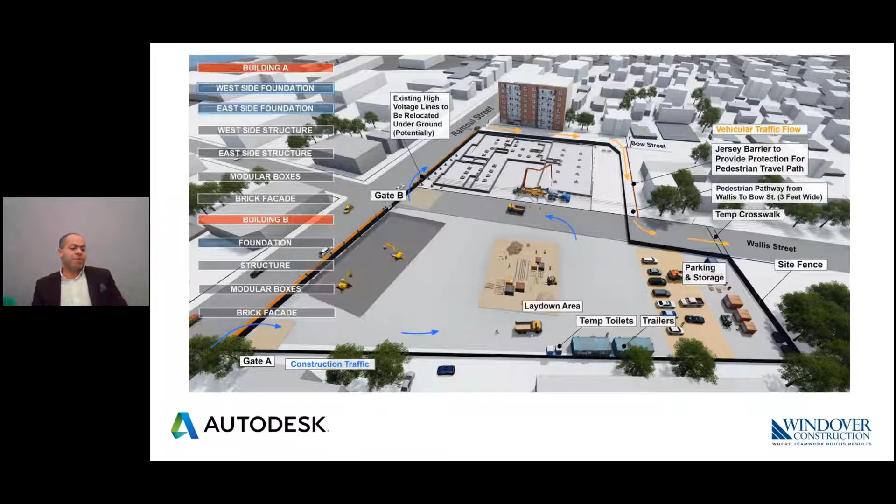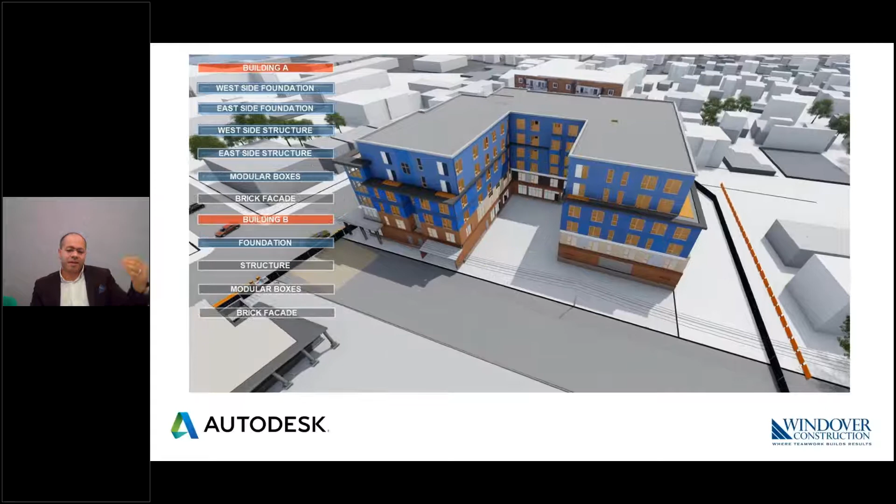are modular construction boxes. The challenge we had here with this project is how to help coordinate that on site with 2 different structure types. As you see here, the scale of that project, as I mentioned, 184 modular boxes on site in Beverly. The challenge here was the first two floors were steel structure and the upper floors are modular.

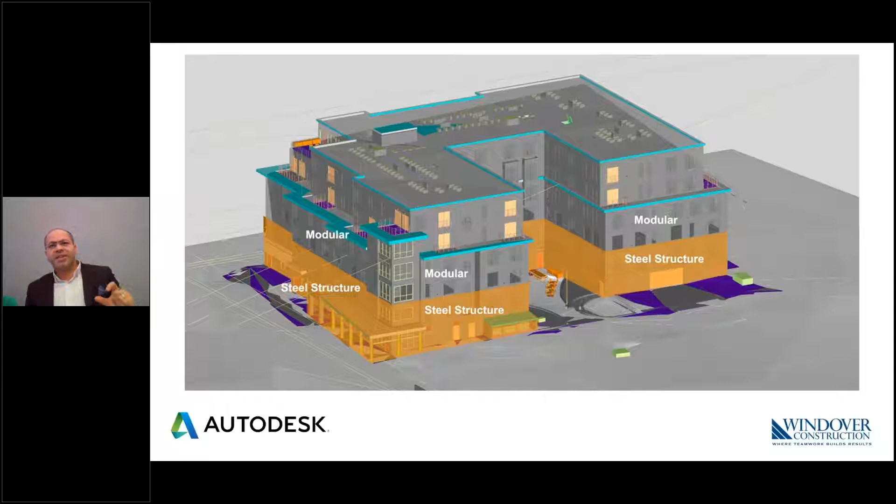The first 2 floors were coordinated through a regular MEP coordination process with a plumber. We modeled all the plumbing elements in Revit, and then coordinated that in Navisworks, and the upper floors boxes were made in the factory that's making the boxes. So how to coordinate between both and make sure that the vertical shafts will fit perfectly and we don't have any surprises on site when we bring those boxes.

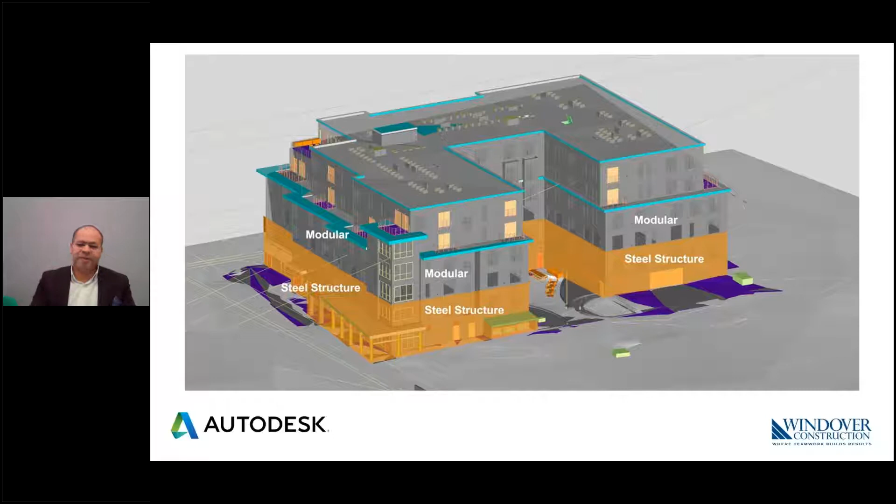So we made sure we place those boxes virtually first before we bring them on site, so they fit on basically the lower 2 floors with a steel structure. How we did that? By combining BIM coordination with drone mapping and laser scanning in real time. As you see here, we use drone mapping and laser scanning every day on our sites at Windover.

What we did in this specific case, and we've been doing in our modular projects, is that after the erection of the steel, we did this in 6 phases. After we erected the steel on site, we fly the drone the same day to capture the as-built steel from above, and supplemented that with laser scanning from below with a Faro scanner that, every 70 meters, is only 3 millimeters off. So the accuracy is there.

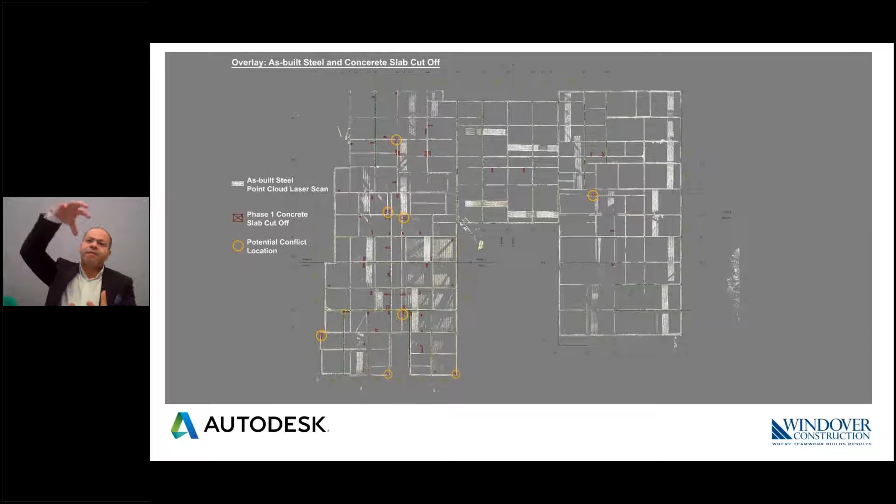And then we combined both point clouds in Autodesk ReCap Pro, to make sure we have all the information from above, the point cloud captured by the drone with ground control points for accuracy, combined with the information we have from below with the laser scanner in ReCap, to do clash detection and detect the conflicts not only with a model created from drawings, but with as-built steel that's on site.

For example, what we see here on the screen, the red box here is where the factory was planning on putting the slab cutoffs for the vertical shafts for the upper floors, for the boxes. And what you see in white is the point cloud captured by both the drone and the laser scan.

And what's circled here in yellow is the potential conflicts that we detected early on in the process and communicated in real time to the factory, so they make the adjustments to make sure when they make the vertical shafts, it will not clash with any steel down below or with any piping.

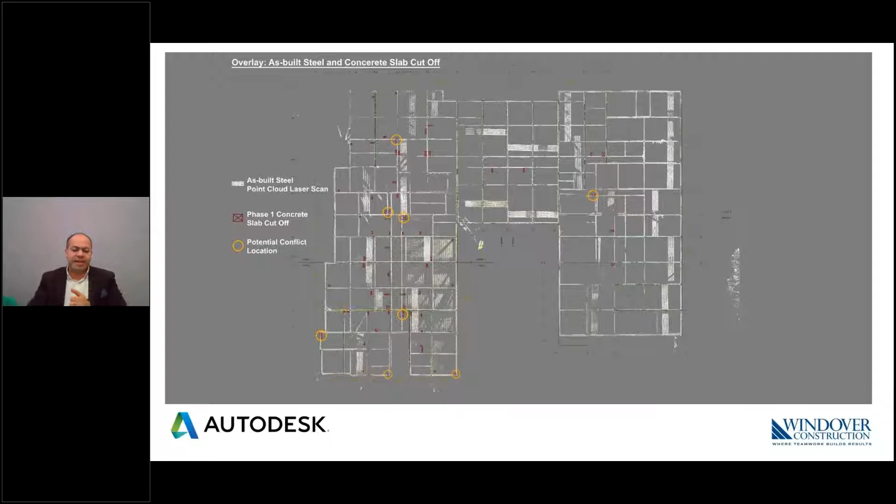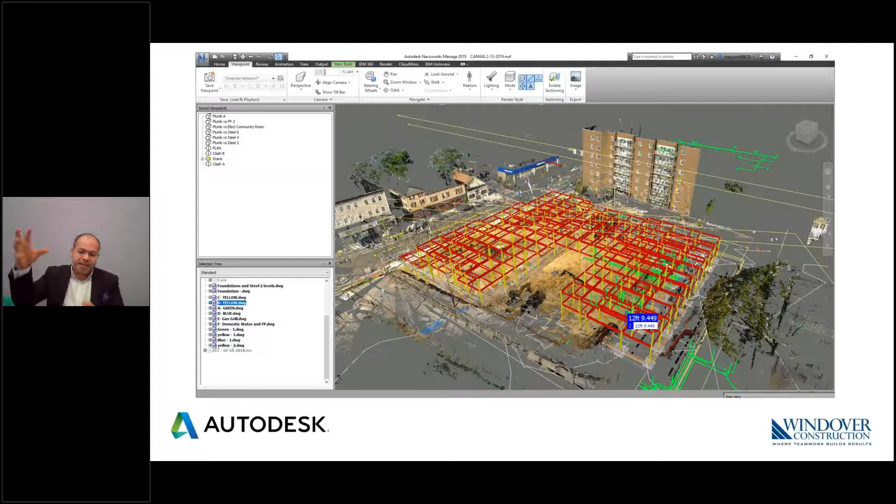We started the whole process, of course, in Revit, modeling all the steel and the MEPs. We also, as you see here in Navis, made sure we, in real time, take all the point cloud that we captured with the drone and the laser scan the same day, overlay it with the plumbing planning we had from below, and do the overlays in real time in Navis. That helped us reach zero clashes when we brought these on site.

As you see here, this is a part of our daily clash reports, which were communicated in real time. Again, time is a very big factor, because when you have boxes made in the factory and the steel is getting erected, the best way to meet the schedule is utilizing this technology in real time.

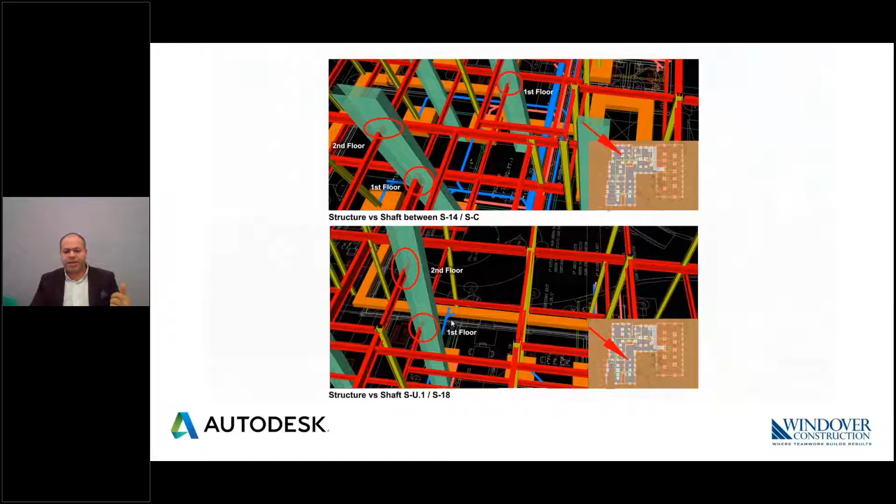Drone mapping, laser scanning, constant overlays in Autodesk Navisworks and ReCap to make sure we communicate these clashes in real time. As you see here, we detected the vertical shaft locations. And so we made sure when we place those boxes, they fit perfectly and all the MEPs are aligned.

To enhance communication in real time, we always communicate through Autodesk ReCap web-based, simple-to-use links with our design team, our field team and the client, so they have at their fingertips, in the trailer or anywhere, the ability to make quick measurements and review the site at any point. We also, at the end of the project, hand the client web-based links from Autodesk ReCap, so 10 years from now they can see what's behind the walls and the ceiling for future facility maintenance.

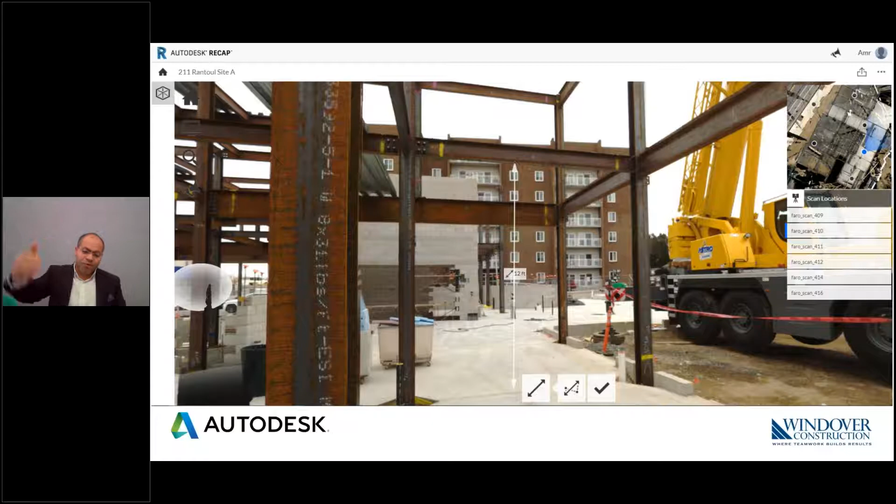So at Windover, we begin with the end in mind. We make sure that we document all the phases, especially with boxes, like in the factory. We document each box with its name or number and hand that to the client so they see how these were built along the way.

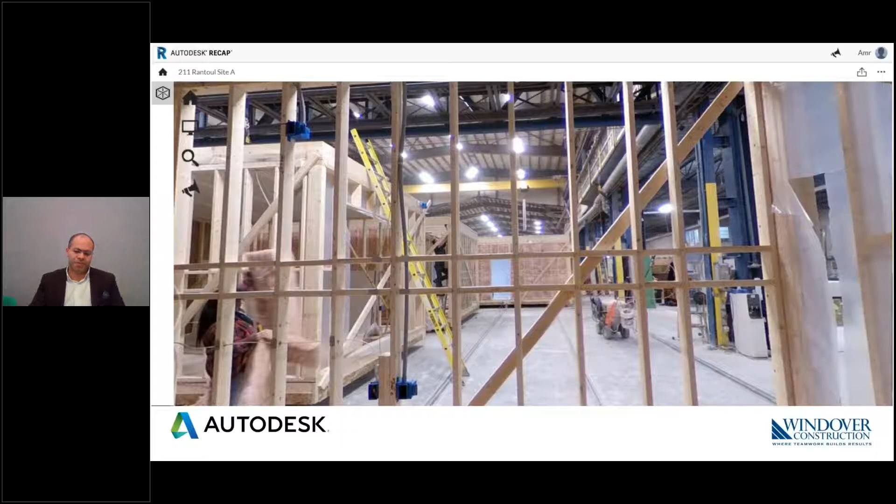Another innovative way we utilized Autodesk Civil 3D is to help detect areas, monitor and analyze the facade alignment, and modify the strapping thickness or the grid size to eliminate issues as the slider went up and down for the building envelope, to help deliver a best-in-class facade that's very smooth and preserves the design intent.

How do we do that? We laser scanned the facade with, again, the scanner that has, every 70 meters, only 3 millimeters off accuracy. We took that point cloud from Autodesk ReCap Pro to Autodesk Civil 3D. We use Autodesk Civil 3D every day with the data we collect from the drone or the laser scan for spot elevations, topographies, and to create contour maps with all the information we collect every day with our drones and laser scanners.

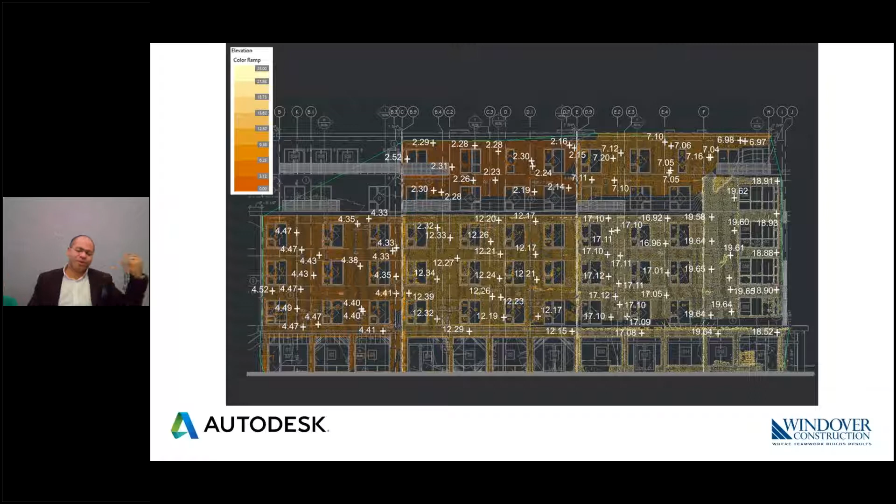Here, what's innovative is that we consider the facade as a contour, as a plane, and we were able to detect the spot elevations on the facade to detect the areas that need attention from our facade team. As you see here, where areas have plumbness issues, this helps resolve that and end up with a smooth, best-in-class facade. So that's another way we used laser scanning with Autodesk Civil 3D to make sure we end up with a high quality product.

So the result for this case study of Canvas in modular construction: combining drone mapping, laser scanning, and BIM, utilizing Navisworks, Revit, Autodesk Civil 3D, ReCap Pro, AutoCAD and ReCap Photo to process all the georeferenced data we have from the drone, helped us end up with zero clashes on site and real-time BIM coordination. It's all real time when you fly and capture this, with constant overlays, communicating with the factories that make the boxes and our field team to mitigate risk in real time.

Preserve the design intent, maximize square footage for the owner. When you fix a clash early in the process before it becomes a problem on site, we protect our owner's square footage and make sure we don't need to reduce any sizes for shafts, or even make the sizes bigger. So we were able to preserve the design intent.

Also, detailed future facility maintenance data by providing the client easy-to-use web-based links that don't require any training, which are the ReCap Pro links. These have been working greatly for many of our clients when we hand over, at the end of the project, what's behind the ceiling and the walls, once we scan that, for future facility management. We'll jump into verification of as-built structure.

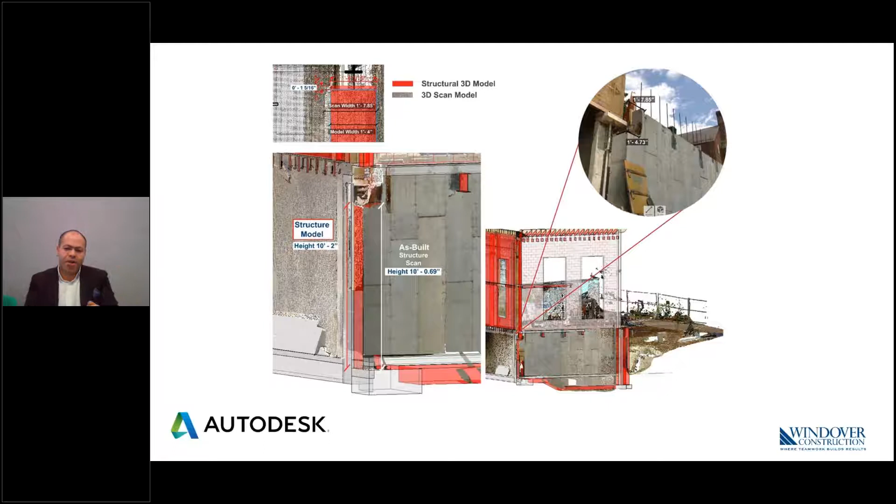Then it helped us detect in this example, and there's so many examples, the pier is a little shorter than it should be. Well, when we scan, say in the morning, and communicate that with our great field team, same day, they were able to communicate that with the foundation trade partner and help resolve that in real time. That's a great example of laser scanning, of drone mapping, constant overlays in Revit to detect the conflicts and help visualize them and communicate them across the project stakeholders.

As you see here, real-time QA/QC define the visual communication in the field. There's no way you can figure out this in 2D. It's all the Revit model overlaid with a point cloud, and then it's very obvious to detect all these clashes or all these discrepancies in the process. Early conflict detection, which basically is very helpful.

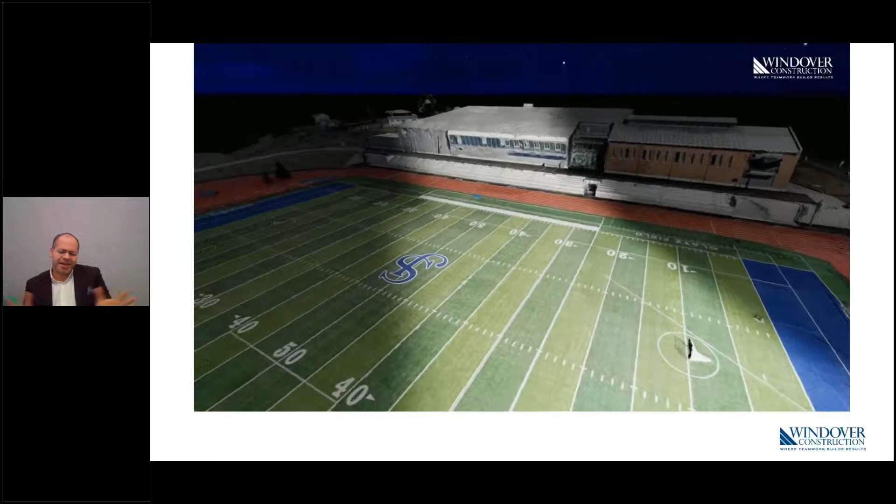Then we talk about post-construction solutions in an innovative way in a light study. We're using drone mapping and virtual reality, which is 3D Studio Max. So Windover built a state-of-the-art sports facility in New England. And an unforeseen challenge came up on site: this beautiful stadium with its bright lights at night games, the light is too bright for one of the neighbors. So the client wanted, of course, to make the neighbor very happy. So they reached out to us, hey, Windover, how can we resolve this?

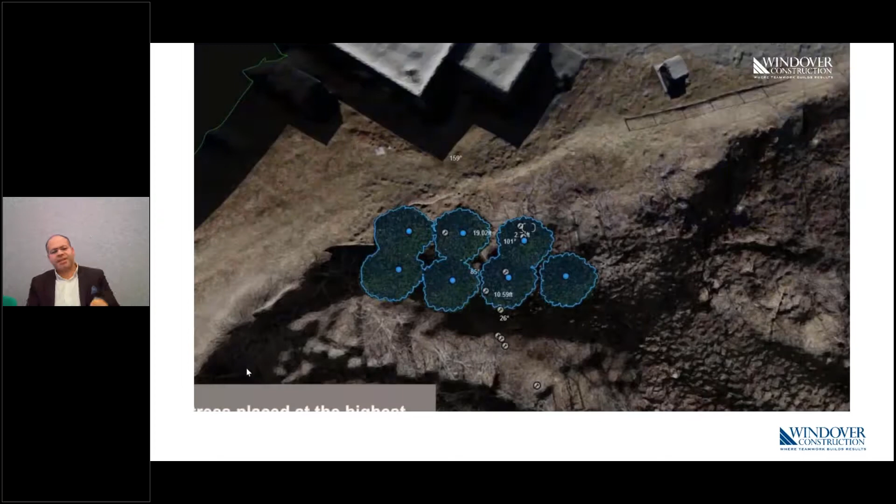Do you have an idea? We immediately flew the drone above the entire surroundings of the site and captured, using ground control points, a very accurate 3D model drone map of this site. And we did a light study in 3D Studio Max. So we brought the drone mapped model into 3D Studio Max and made a light study of how we can block that light. As you see, this is ReCap Photo where we processed all the drone data.

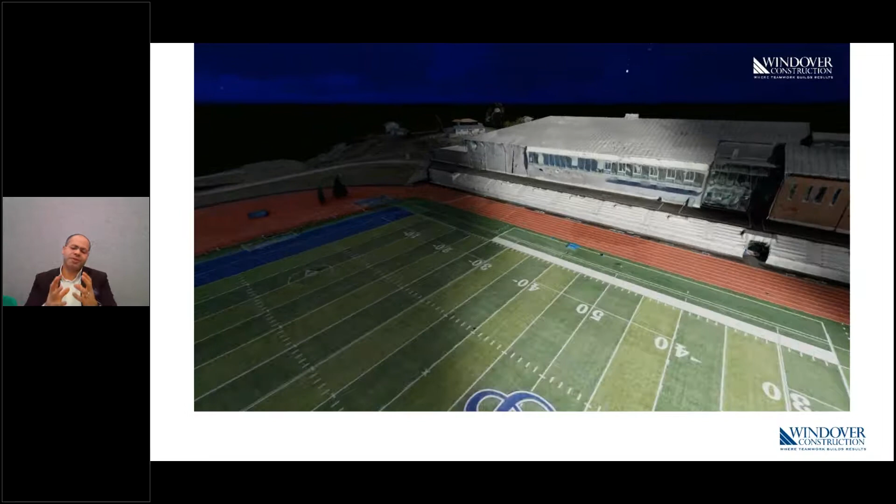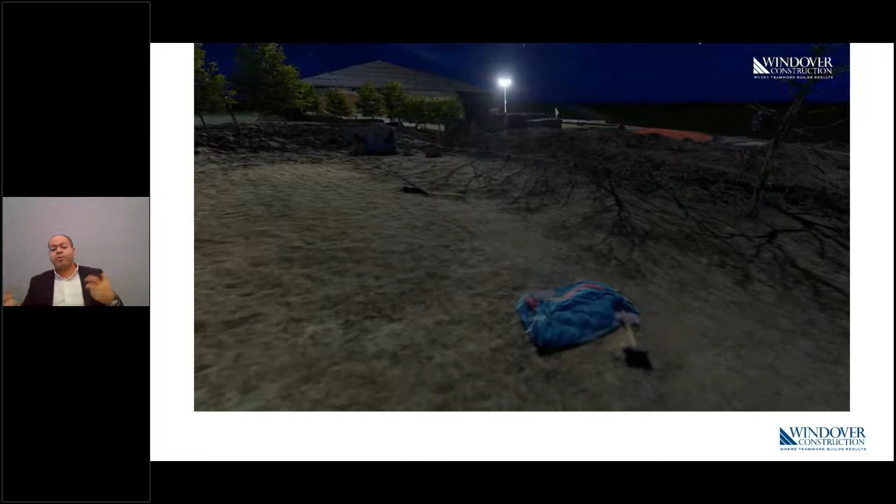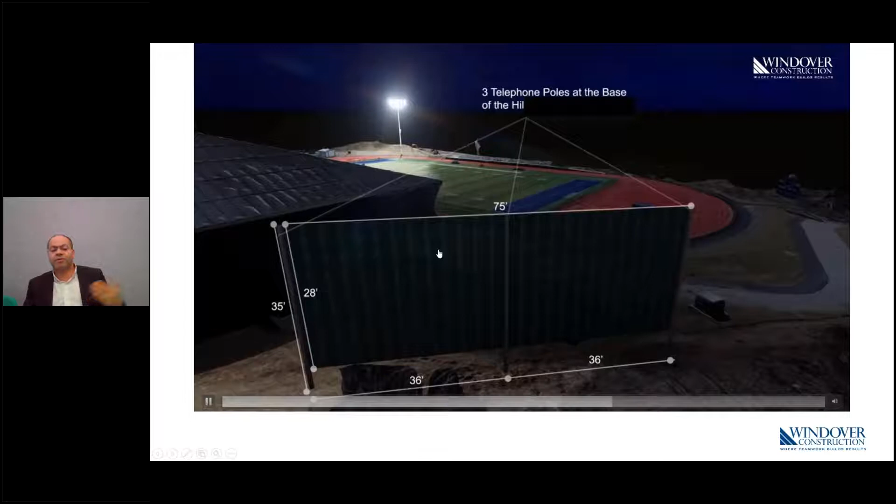What we did is that we modeled the light from the cut sheets in Revit, and we took that into 3D Studio Max using all the powerful tools in 3D Studio Max to simulate the exact light intensity and hue and make sure we simulate that in VR. And we tried evergreen trees in VR, how we block that. We used the shade idea, and that all helped us in a couple of days to very quickly, non-disruptively, find a solution, know exactly what solution we will use to block that light, how much shade we need to order, and things like that. So this all helped us to find the solution, and we were able to locate that exact shade and its location in relationship to the existing building that we built to offer a solution.

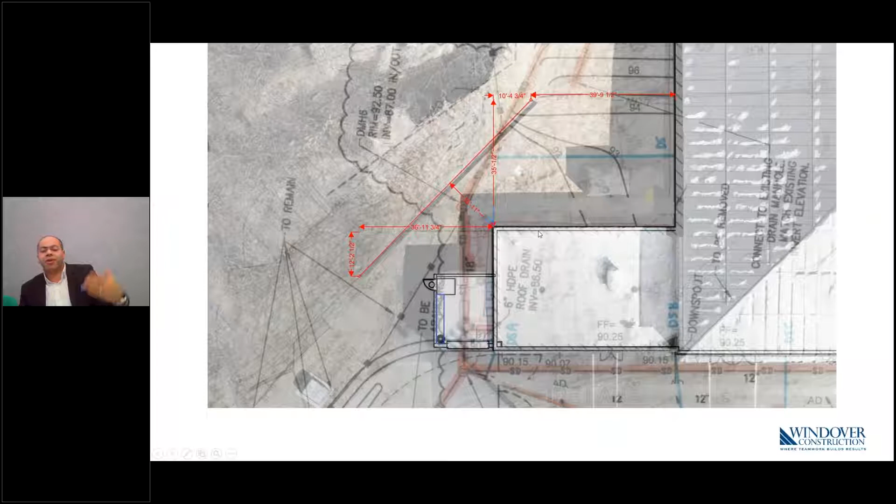That's a great example of combining drone mapping with VR in 3D Studio Max to do a light study to resolve an unforeseen situation that is actually not construction or design. It actually happened after construction is done, but that shows how we can utilize Autodesk technologies with VR, with drone mapping, to help and support our clients even way after the project is completed. At any phase, support our owners and our clients. So efficient, non-disruptive post-construction solution and significant time and cost saving by eliminating a trial and error approach.

Imagine if we didn't do that, we'd go at 10 p.m. at night to simulate a night game, and bring big evergreen trees, and see how we will block it, how we locate them for position, or bring that sheet, we'd have to order them. So we didn't have to do all that. We did it all virtually in virtual reality using 3D Studio Max and the drone map model.

Let's go to the future and see what we've been doing and can continue to do to help us build better. For example, robotics. You know, what I talked about, improving on-site coordination, as you see here. This is one of our projects. It's Standish Hall at Endicott College, one of our Windover projects. If you look at that building, it's really hard to recognize it's a modular building. Its unique features, its design.

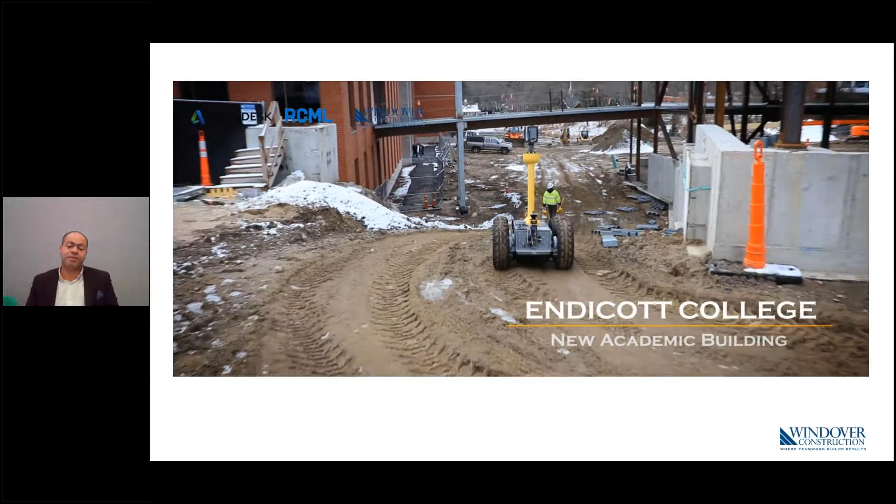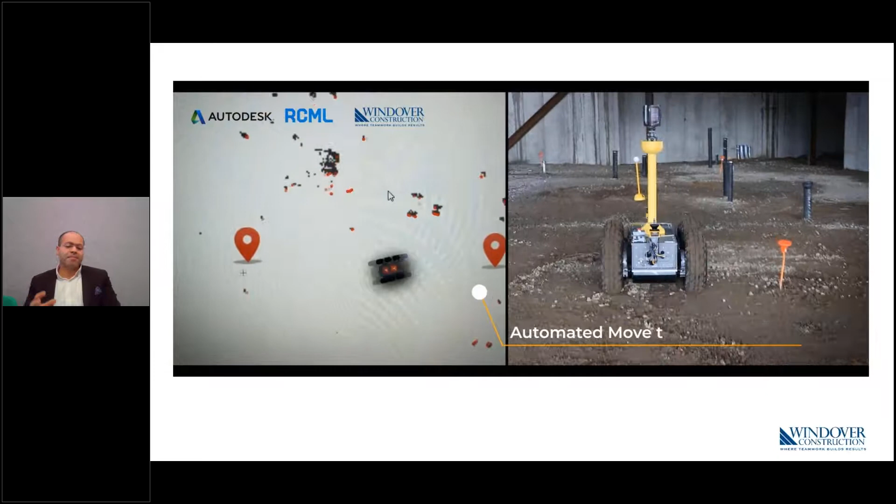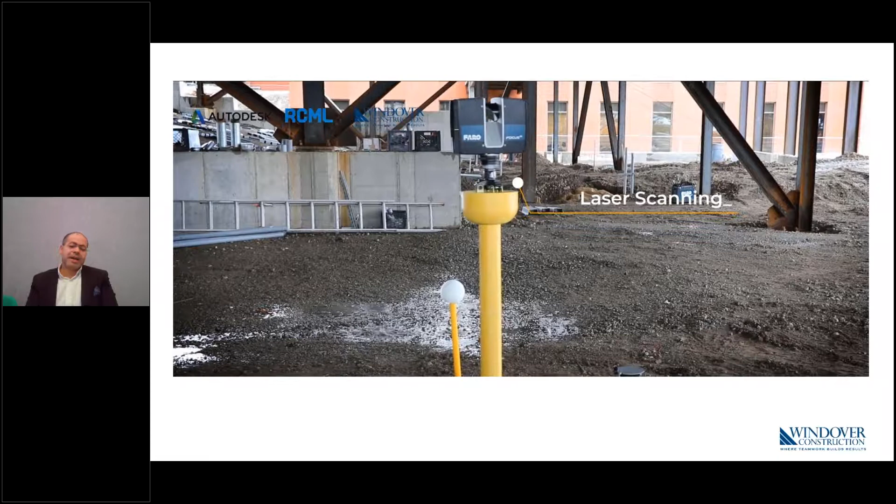Another way we try to help build the future and transform construction is that Windover Construction teamed up and partnered with RCML, a great robotics company that does great software for robots. RCML and Windover worked together with the support of Autodesk. Actually, this idea was all born at the Autodesk Technology Center in Boston. We are both residents at Autodesk, RCML and Windover.

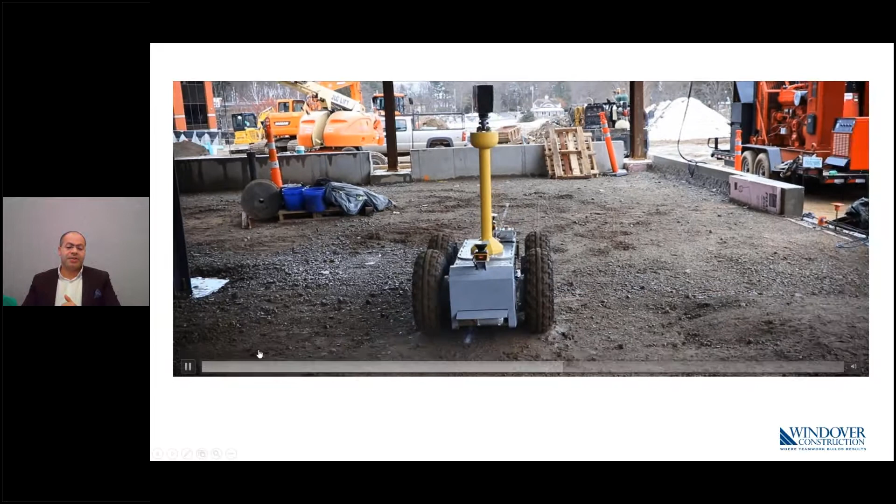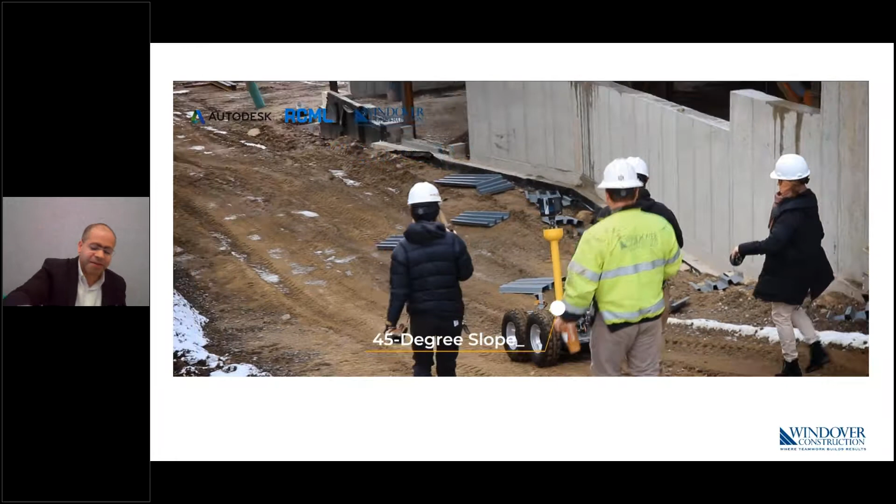So what Windover and RCML partnered to do is a robot that would do an all-in-one solution for construction: laser scanning, and wall and utilities layout. RCML developed great software that can do autonomous laser scanning. It's a very sturdy design, can go 45 degrees. It's built for job sites. As you see here, it can move from a predetermined target. It's very simple. Anyone on the job site can do it.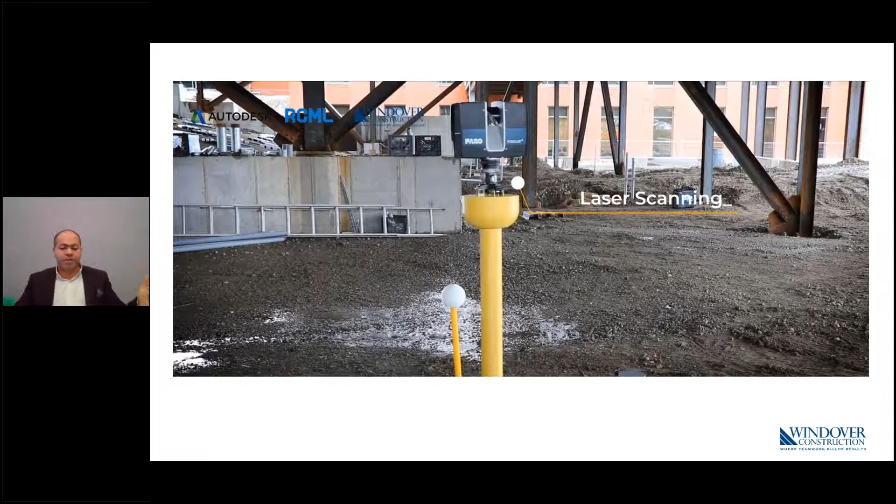When we come in the morning, we place those targets here on site. Those targets are only for the robot to know where to stop. It stops there and scans 16 minutes, moves to the next one autonomously, and at the end of the day, our team takes the files from the stick in the scanner and processes the files.

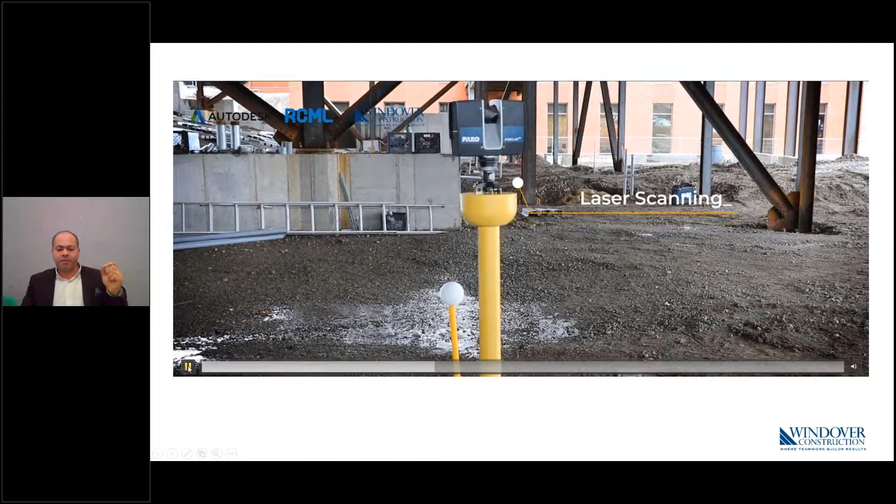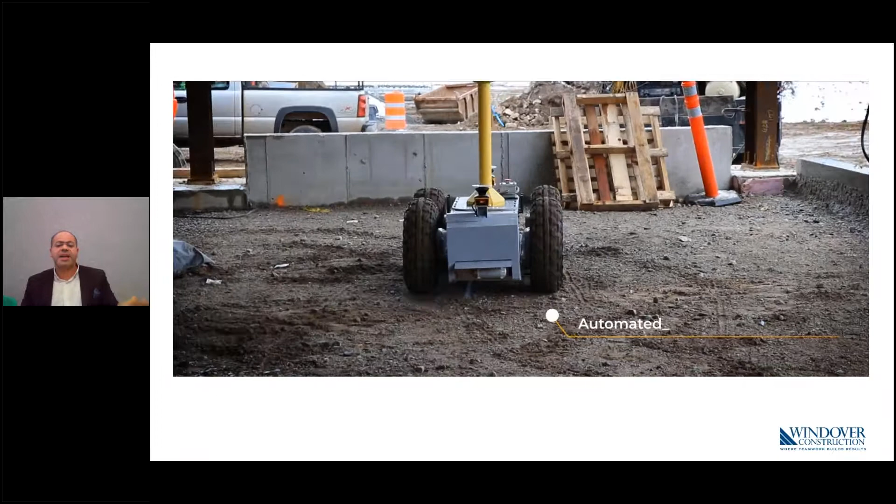This is not replacing anybody's work. It's only supporting our BIM and reality capture teams to focus on what really matters, which is creating the models in Revit or processing them in Autodesk ReCap. Say in very cold weather like in New England these days, or a containment area, we can send that robot, do the scans, and our field team or our BIM teams process the data.

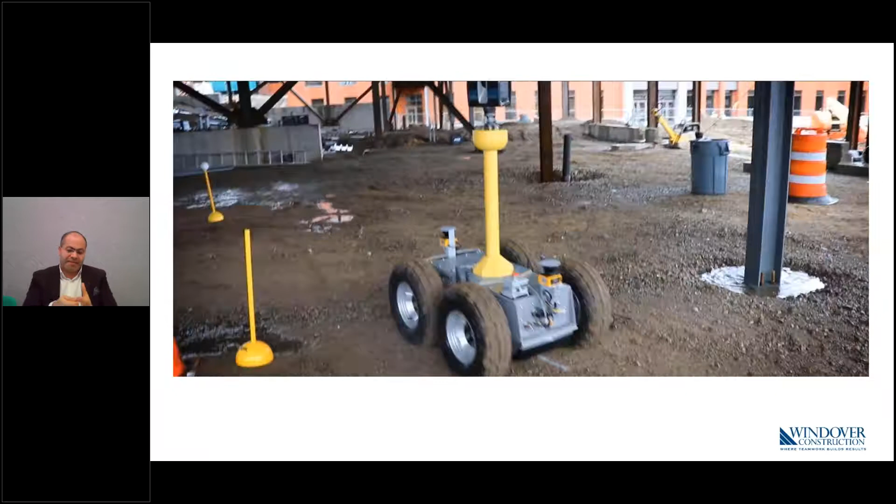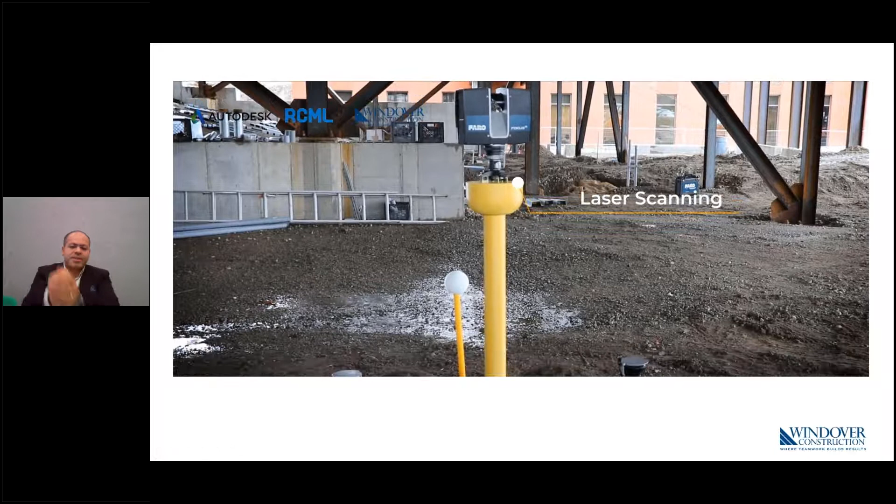Up until now, in order to laser scan a building, you would have to wait 16 minutes outdoors or 9 minutes indoors for each scan, doing nothing, waiting until it scans. So it's saving us time in that aspect.

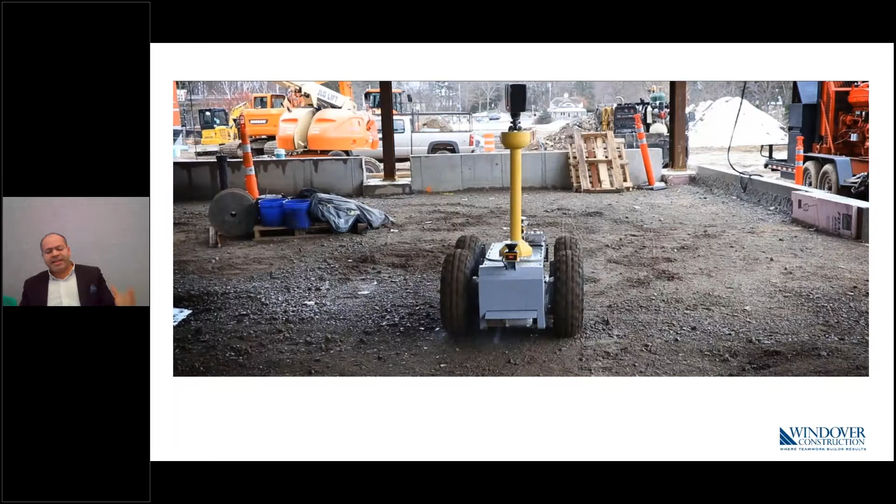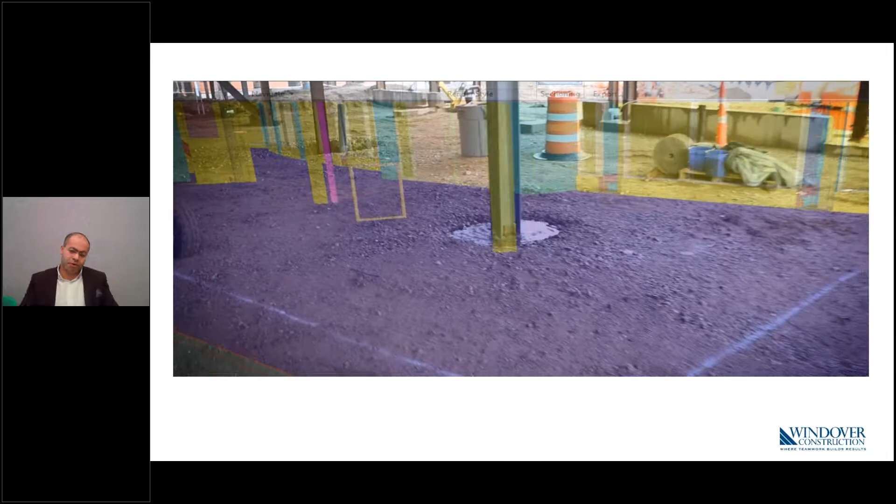Another very powerful solution, that's why I call this an all-in-one solution, is that it can do automated walls and utilities layout. It takes the AutoCAD files straight from our trade partners, plumbing or walls, simple AutoCAD files, and it can translate that to spray it on the floor very accurately. So that's another way of supporting this.

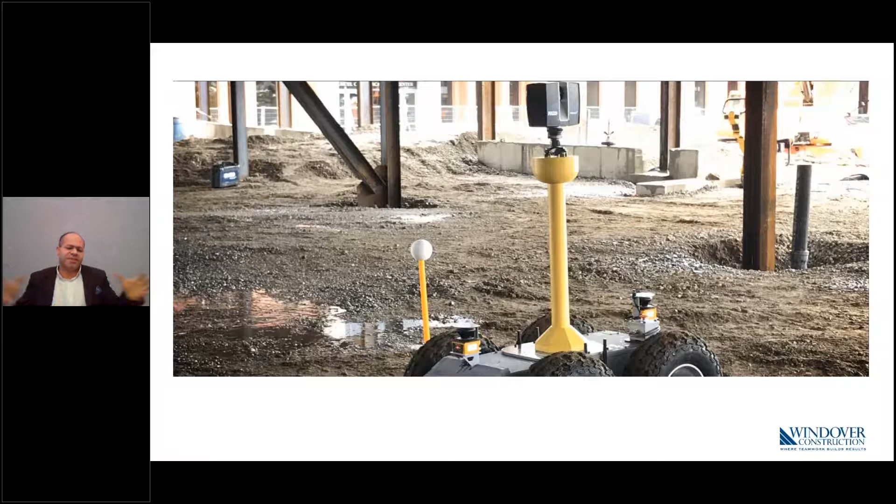Up until now, again, we would have to have a carpenter measure from different areas, and a building would take 3 days for someone physically with a traditional method to lay out. This robot can do it in probably 6 hours, automated.

So that collaboration and partnership between Windover and RCML, with the support of Autodesk, is really going to transform how we do laser scanning, how we do reality capture, and how we do layout, and other solutions that will come through that collaboration to really help transform construction, build better, safer, and let our teams focus on what really matters.

That will all help transform modular construction, because as we mentioned before, we are transforming modular construction through BIM technology, laser scanning and drone mapping, and robotics will play a big part of that to help build more modulars. Modular is not only good for quality, because you build in a quality-controlled setup in a factory, but it's also greener, and the future is being greener, and it should be happening right now. And that's what Windover really cares about with RCML, our partners, and of course Autodesk.

So this is empowering our VDC, this automation of the construction BIM relationship with the field, empowering VDC and reality capture teams, enhancing safety in cold and containment areas, scanning, and accurate indoor and outdoor layouts directly from Autodesk AutoCAD. So to recap, this is all made possible by AutoCAD, for example for this robot layout or early drafting. Many of our trade partners use AutoCAD to lay out their trades.

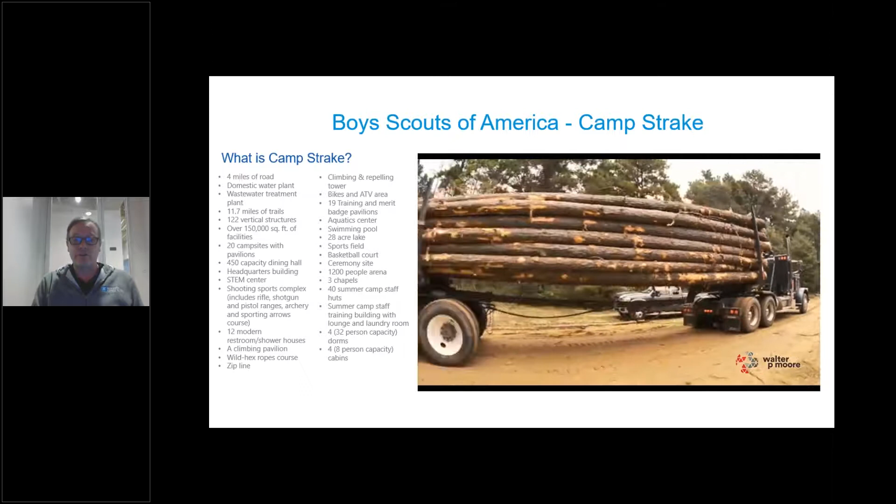Camp Strake's facilities include 4 miles of road, a domestic water plant, a wastewater treatment plant, 11.7 miles of trails, 122 vertical structures, over 150,000 square feet of facilities, 20 campsites with pavilions, a 450-capacity dining hall, a headquarters building, a STEM center, a shooting sports complex, which includes rifle, shotgun, and pistol ranges, also archery and a sporting arrows course. There are 12 modern restrooms, shower houses, a climbing pavilion, a wild hex ropes course, zip line, climbing and rappelling tower, bikes

and an ATV area, 19 training and merit badge pavilions, an aquatic center, swimming pool, 28-acre lake, a sports field, a basketball court, ceremony site, 1,200-person arena, 3 chapels, 40 summer camp staff huts, a summer camp staff training building with lounge and laundry room, four 32-person-capacity dorms, and four 8-person-capacity cabins, and more. So you can see it's quite a large facility.

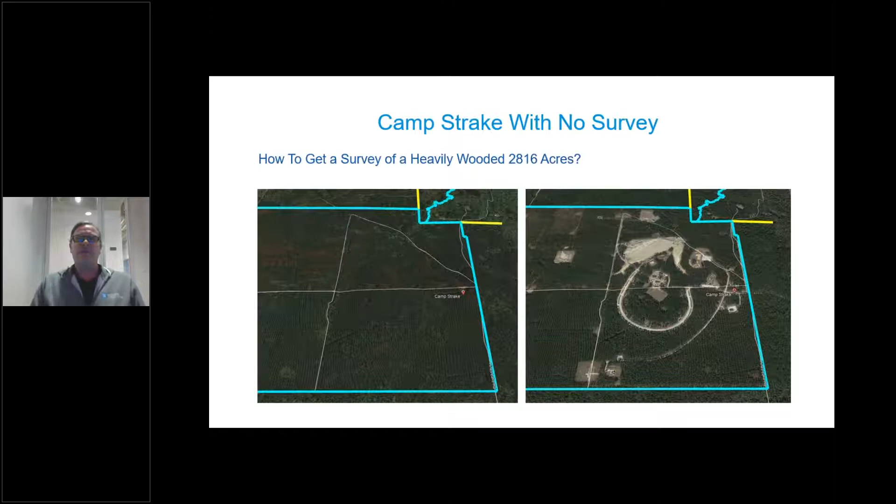Surveying this heavily wooded 2,816 acres would have been a very extensive cost range. So there wasn't very much means to get in there and do surveying to begin with.

So LiDAR was used, using the Esri Collector for ArcGIS app on an iPad. There was no local survey control, and because of the density it was not financially feasible to get this survey done traditionally. This app allowed the contractor to find their location based off the overall site layout.

Within the app, they could pinpoint and locate the precise location of the design that was done in Civil 3D. This allowed the guys to get out there and find out exactly where these buildings were located based off this app, and then get the machines in there and get everything prepared.

And we were doing our design in Civil 3D at the time. More challenges we faced: now the site was laid out and the location of the facilities was determined, the design of the site could commence.

A few major challenges faced in design was the endangered species habitat. The existing road had to be realigned in Civil 3D to avoid disturbance of the natural habitat.

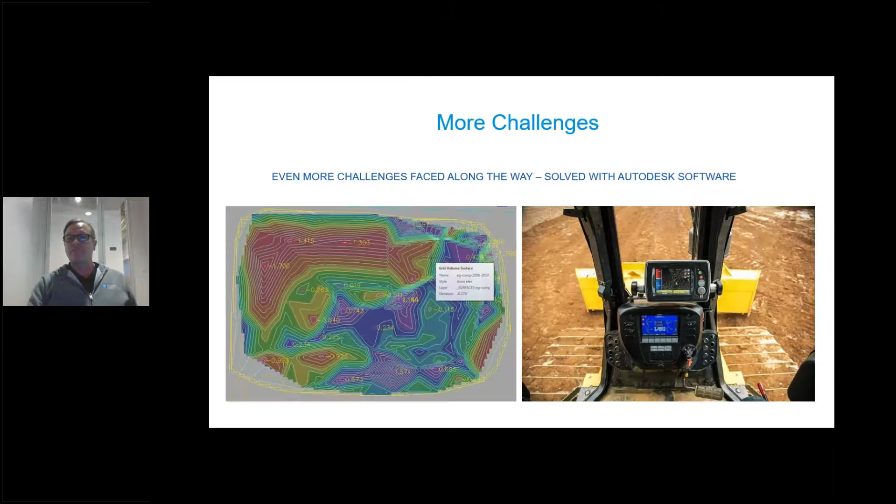Another challenge was the proposed lake. Excavation of the adjacent hillside to fill the bottom of the lake was graded, and earthwork calculations in Civil 3D were used to site the dam for the lake to avoid the United States Army Corps of Engineers jurisdiction stream. Civil 3D was used to export the digital elevation model for upload to excavators used in machine control.

So how did Camp Strake lead us to use this AEC Collection on a daily basis? Instead of LiDAR, we could have used ReCap Pro with a drone to produce more accurate survey data. We have since started using ReCap Pro heavily and have a list of vendors on hand whenever we need to have a site flown.

We could have used InfraWorks to lay out a preliminary design and preliminary cost of construction of the road and lake, then tweaked it in Civil 3D. Alternatively, we could have pulled the LiDAR straight from InfraWorks as well.

We now use InfraWorks in some sort of way on almost every single project we do in this office, whether it's just to pull LiDAR for a new project or a preliminary layout of the site to get the feasibility studies.

So with the help of Autodesk and its employees, we've started to use this AEC Collection more extensively in production. We've assessed our software library and found some software that's no longer needed because we use the AEC Collection now. We've sped up production thanks to the Collection and cut a big percentage of rework out.

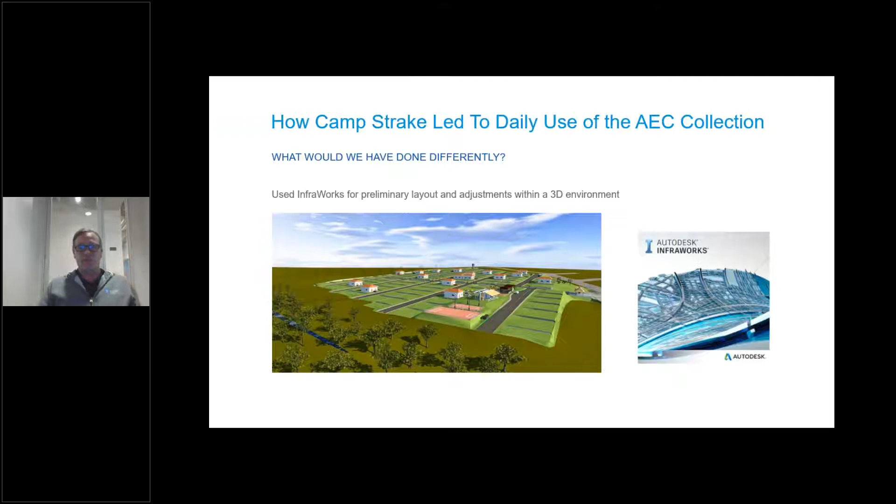Now with the help of BIM 360 for Civil, we are headed for more savings and faster production of bigger, more complex projects, one of which is the Walmart home campus.

One of our most recent projects here at Walter P. Moore is Walmart's home office campus. This is comparable to Google or Apple's campus. With its roots being in Bentonville, Arkansas, it only makes sense that its new campus be located there.

Along with the use of the AEC Collection and BIM 360, we are moving forward and meeting deadlines that would have never been achieved, or would have been very hard to achieve, in the past. The use of these two have made design changes and collaboration a lot easier.

This project is just the start of a very successful beginning at taking on more projects at this level of design. Utilizing the AEC Collection to its full potential will make design and collaboration a smooth and seamless procedure for all of our future and present projects.

On this Walmart project, I did a very neat little operation. I used InfraWorks to bring in the SketchUp models from the architect, then exported this out into 3ds Max Interactive. It used to be called Stingray.

So this is me actually with an Xbox controller recording my screen. Driving around this campus allows you to see how difficult it would be to make some of these turns, and also to see certain areas - how one building may affect the look of another building, or if they needed to see a building and couldn't see it very well, you can check that.